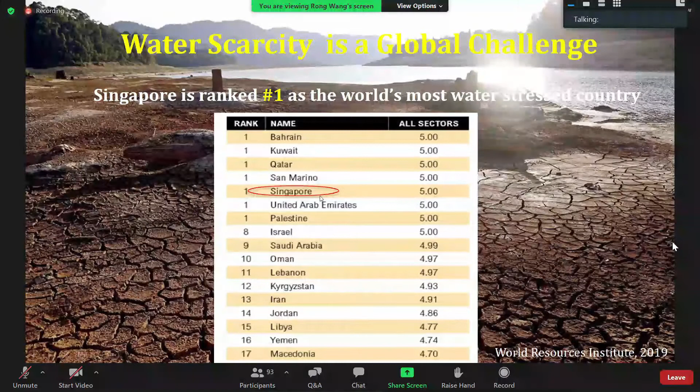Let's start. We know water scarcity is a global challenge. According to data released by the World Resources Institute in 2019, Singapore is ranked as the number one most water-stressed country in the world. Here is the ranking list, with Singapore listed here. On the other hand, we know the ocean on Earth contains around 97% of the entire water supply. Seawater represents a virtually infinite water resource, with almost half of the world's population living within 100 kilometers of an ocean, meaning we can access the ocean quite easily.

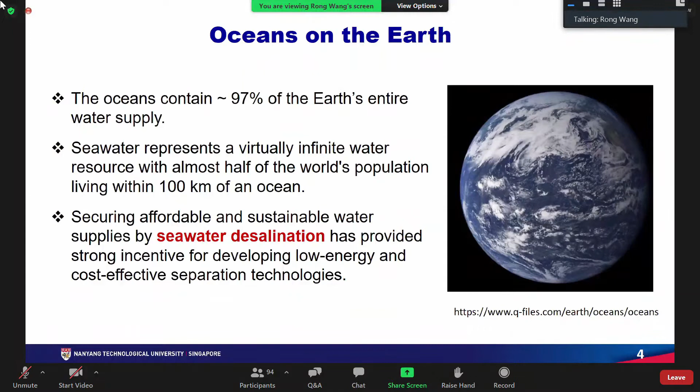So securing an affordable and sustainable water supply by seawater desalination has provided strong incentive for developing novel desalination technologies. In the past 20 years, there has been tremendous growth in constructing desalination plants for sustainable water supply. Among the various desalination technologies, seawater reverse osmosis is dominant in the market due to its better energetics and lower footprint.

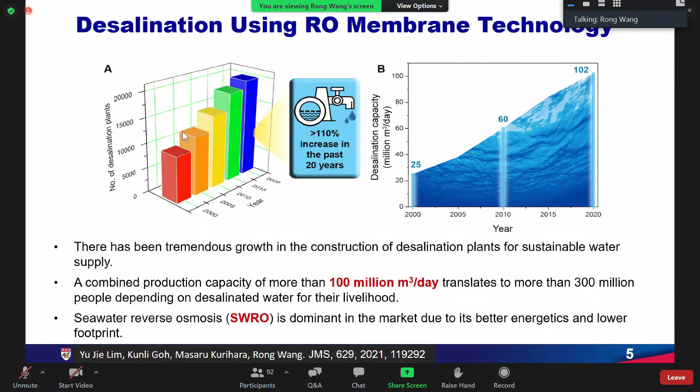Now let's look at Singapore's situation. Singapore started its desalination journey in 2005 when the first desal plant was set up. Currently, Singapore has 4 desalination plants, with one more ready very soon. Today, desalinated water can meet up to 25% of Singapore's current water demand, and by 2060 this number will increase to 30%, which refers to our future water needs.

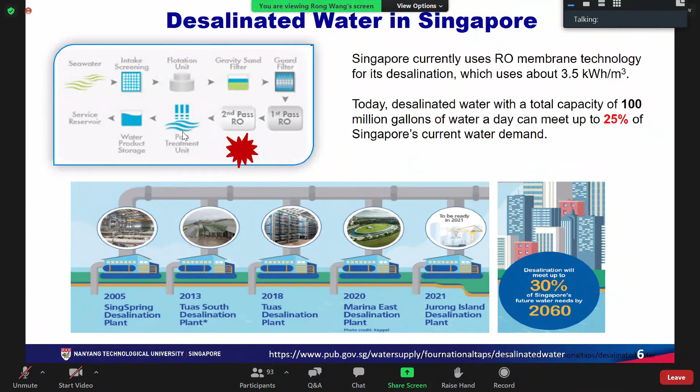As I mentioned, reverse osmosis is the dominant, state-of-the-art technology for seawater desalination. At the center of RO technology are thin film composite (TFC) RO membranes. The typical structure is shown here: a TFC RO membrane has a relatively thick and porous support, with a thin polyamide active layer on top, about 200 to 300 nanometers thick, formed through interfacial polymerization, where MPD in the aqueous solution reacts with TMC in the organic phase. So the key factor deciding TFC membrane performance is the top selective polyamide layer.

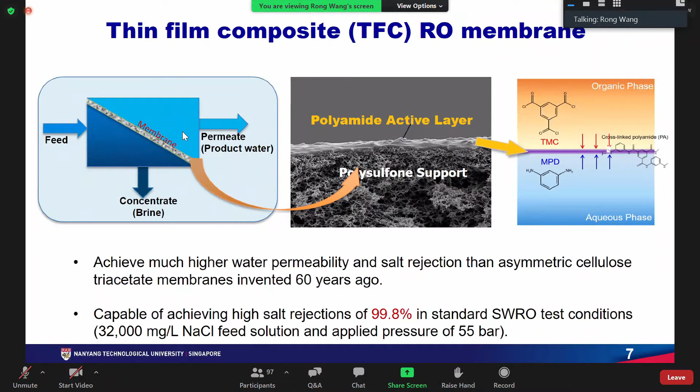Over the last 60 years, there has been tremendous growth for the SWRO membrane. For SWRO membrane development, you can see from this milestone chart, starting from 1963.

Now in the 2000s, SWRO products in the market were produced by key industrial players like GE, Koch, Dow, Toray, Hydranautics, and Nano H2O. Those membranes have very good salt rejection, around 99.7 to 99.8%, and water permeability around 1 to 2 LMH per bar.

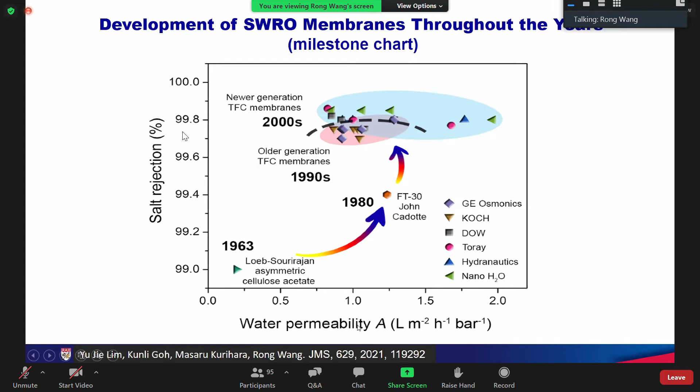However, further exploitation of this technology is limited by the relatively low water permeability and the high specific energy consumption required, which multiplies to high unit cost for water production. In addition, membrane fouling, insufficient boron rejection, and poor chlorine resistance are challenges for SWRO membrane development.

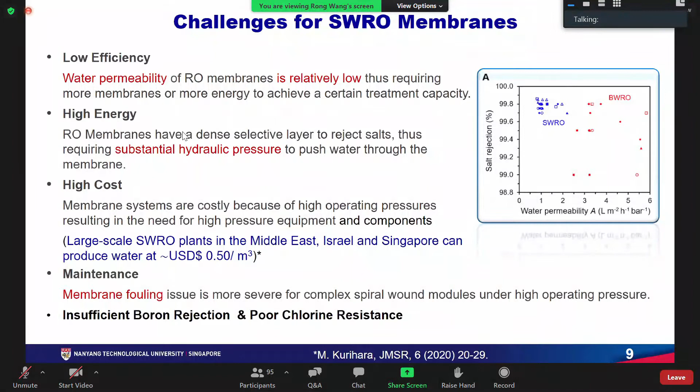For SWRO, it was projected that if water permeability increased from 1 to 3 LMH per bar, the energy consumption and the number of pressure vessels of the SWRO plant can be reduced by 15% and 44% respectively. In other words, the ideal SWRO membrane should have water permeability around 3 LMH per bar with sodium chloride rejection around 99.8%. This is referred to seawater.

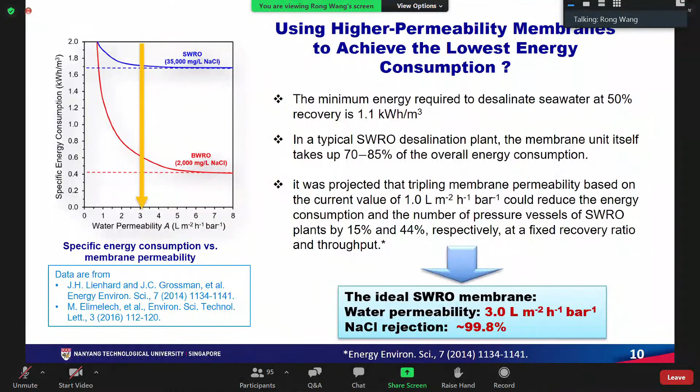Now let's look at the recent progress for SWRO membrane development in the last 10 years. It is a big surprise to see the numbers of publications and patents for SWRO membranes are quite low, especially compared with publications for BWRO membranes. I think it indicates it's quite challenging to develop the SWRO membrane as compared with the BWRO membrane.

But in the market, from time to time, we always see new products or new brochures from SWRO membrane manufacturers like Toray, DuPont, Hydranautics, LG Chemicals. I think their innovations are considered proprietary information that was not published openly.

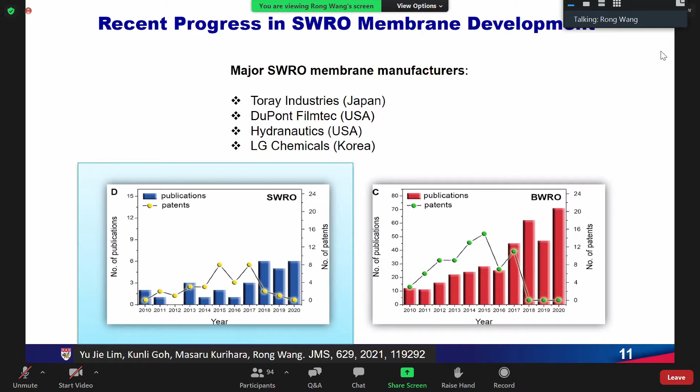So, what can we learn from the literature? Here I summarize some key factors and challenges for the synthesis of the SWRO membrane. I will go through this information in the following slides.

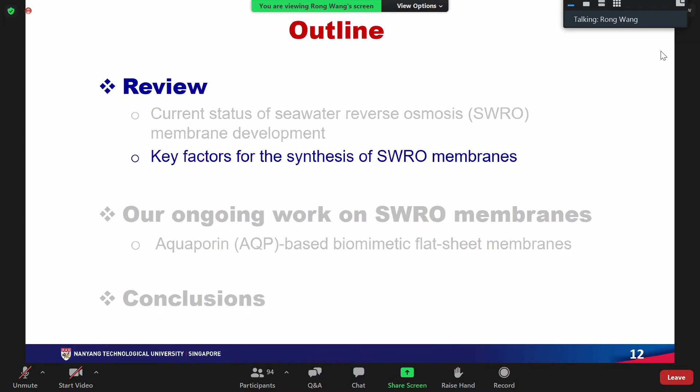Some research concerns the substrate. Indeed, the substrate is the platform for the interfacial polymerization to form the selective layer. So the surface property and pore structure will definitely affect the IP layer formation. People try to optimize the support layer in terms of pore size distribution and pore density.

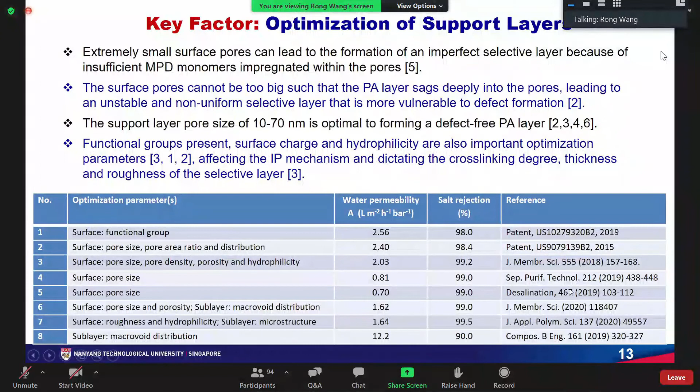Also, people try to adjust the surface charge and hydrophilicity of the support layer in order to get better membranes after applying interfacial polymerization. Some key references in recent years are listed in this table.

We hope to minimize the mass transfer resistance in the substrate and provide a better platform for the IP layer formation. We found a more porous support can also be used for SWRO membrane fabrication if it has a recurring finger-like sublayer structure, so that the stress is evened out on the support. You can look at the structure like this.

This is the structure we developed, and we did the analysis, and also measured the mechanical strength to confirm it's strong enough.

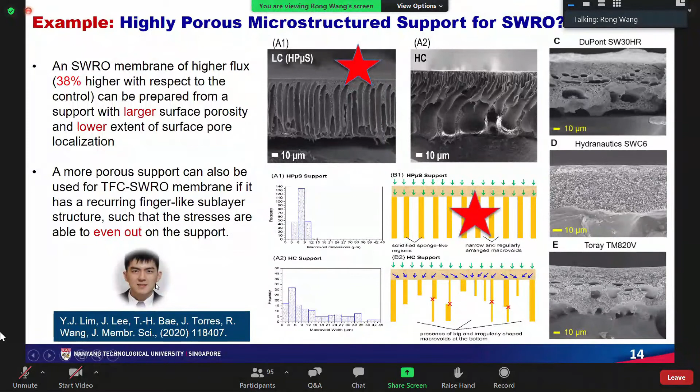We understand that for the TFC-RO membrane, the selective layer plays a critical role in determining membrane performance. So a lot of R&D focuses on optimization of the selective layer. We can change the interfacial polymerization formula or procedures in order to adjust the matrix structure and finally fine-tune the membrane performance.

Four important parameters affect the permselectivity of SWRO membranes: thickness, roughness, cross-linking degree, and hydrophilicity of the polyamide layer. So by changing the interfacial polymerization formula and procedures, we can change these parameters.

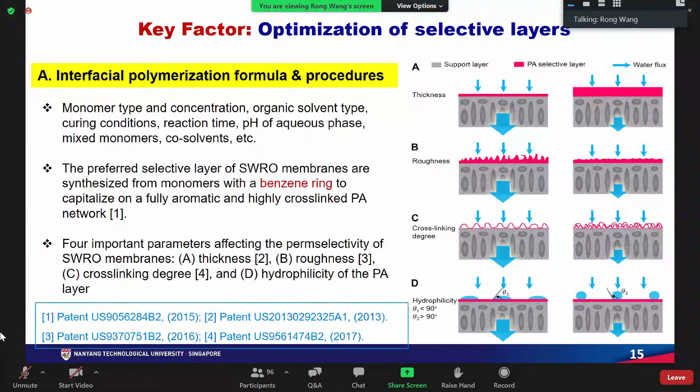Here I give you another example, also done in my group. We try to understand the role of the aqueous and organic co-solvent in fabricating SWRO membranes. We found the presence of co-solvent in the aqueous phase promotes the diffusion rate of the diamine monomers, and in turn tailors the physical chemical property of the polyamide layer, so we can improve the membrane performance.

This work was done by my other PhD student, Li Can, and this manuscript has already been submitted to the journal. It is currently at the first round of revision.

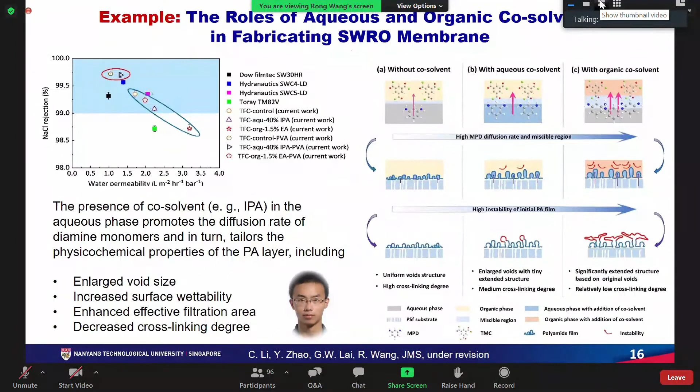Different types of filler materials like zeolite, graphene oxide, carbon nanotube, MOF, etc. have been widely used to make thin film nanocomposite SWRO membranes to enhance membrane selectivity, boron rejection, chlorine resistance, or reduce membrane fouling. But the issue is that incorporation of filler material in the polyamide layer can lead to defect formation, which will compromise the membrane selectivity. Another challenging issue is that when we scale up the fabrication, how to avoid the defect formation. This is the critical issue.

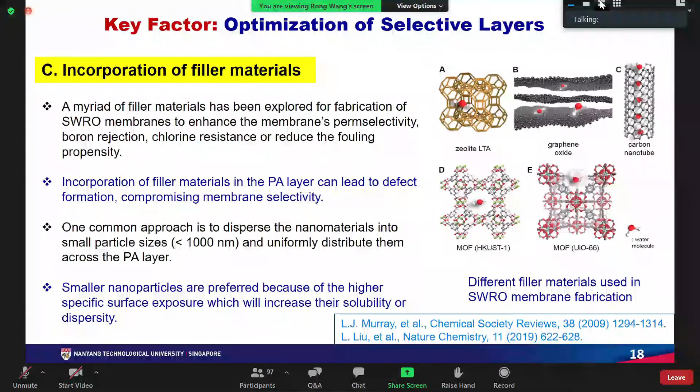Biomimetic membranes have attracted much attention in the last 10 years because of the outstanding water transport property of natural water channel proteins like in biological membranes. One of the successful fabrication methods was based on incorporation of the water channel or synthetic water channel within lipid bilayers or amphiphilic block copolymer.

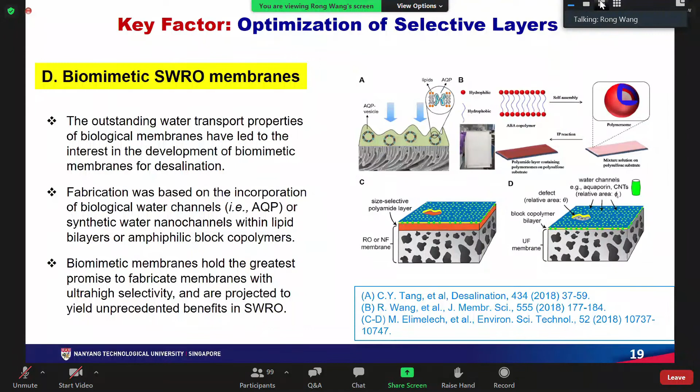This channel-containing vesicle will be embedded into the polymer matrix through interfacial polymerization. Actually, this method was invented by us at the Singapore Membrane Technology Center. We reported the first aquaporin-based flat sheet membranes and aquaporin-based hollow fiber membranes for brackish water and water reuse application in 2012 and 2015, respectively.

For flat sheet membranes, the water permeability can improve by 50%. For hollow fibers, the permeability increased by 100%, double the permeability, while maintaining similar level or even higher salt rejection.

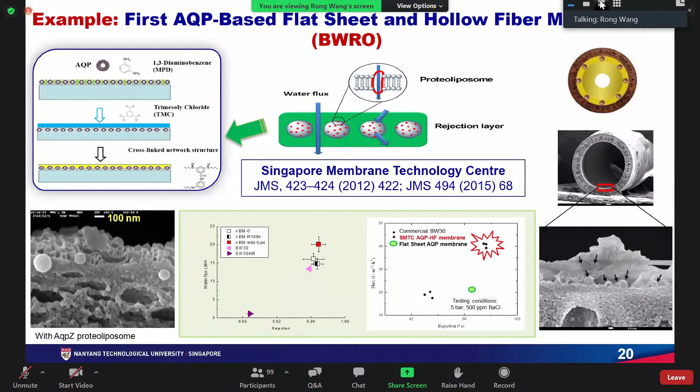We have scaled up the fabrication of the biomimetic membranes to an 8-inch size membrane module containing 12,800 pieces of fiber.

This is the hollow fiber, RO type, and the membrane can operate at low pressure for brackish water and NEWater application. Currently we have a pilot system running at the Singapore local NEWater production plant, and the testing has been over 220 days. The capacity is 14 cubic meters per day for clean water production.

Our test results demonstrate that our membranes can lead to 40 to 50% pumping energy saving for new water production. This is a very exciting result. And our technology has been licensed to a spin-off company last year, MEM+, for commercialization.

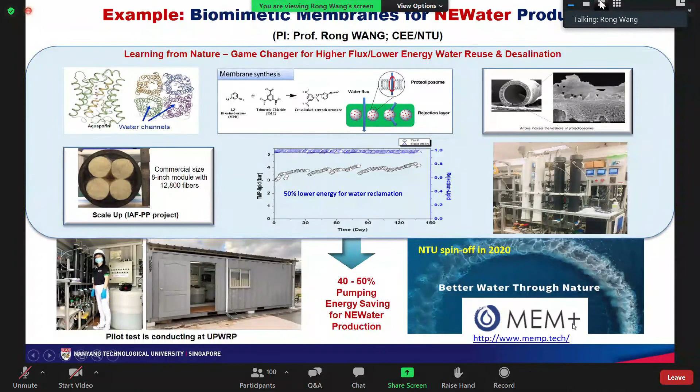What I just talked about is the biomimetic membranes for brackish water application. We also try to make aquaporin-based biomimetic membranes for seawater desalination. We know for seawater desalination, the conditions are more challenging because of the high salinity.

The rejection layer should be very tight so that it can reject the salts. Finally, we worked out the first aquaporin-based biomimetic membranes for seawater desalination in 2019. This work was published in the Journal of Desalination, and Dr. Li Ye and other team members contributed to this work.

This work gives us confidence. It shows the aquaporin-based membranes also have the potential to be used for seawater desalination.

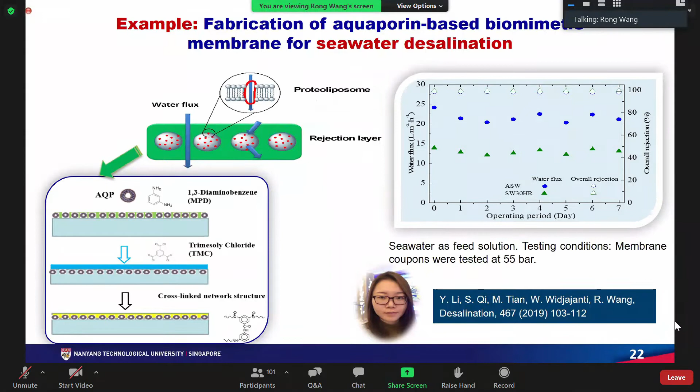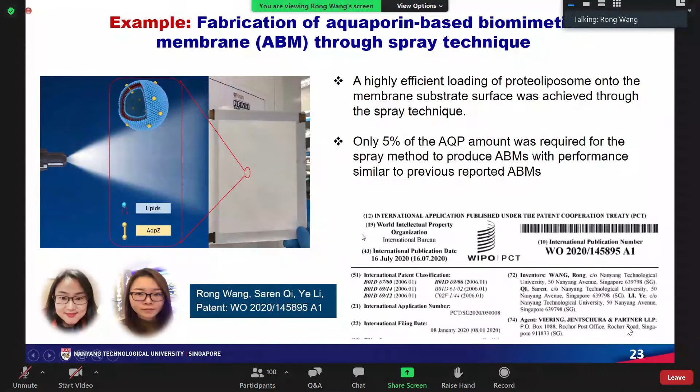Now I will go through some details to show you what we are doing now.

The objective is to fabricate high-performance flat-sheet seawater aquaporin-based membranes by enhancing the salt rejection over 99% to sodium chloride and double the water permeability compared to the commonly used SWRO membranes in the market.

In the second phase, we'll scale up the membrane fabrication to make 2.5-inch and 4-inch membrane modules. We will build a pilot with capacity of 10 cubic meters per day of clean water from seawater using our biomimetic membranes for water production. That's a very challenging task.

The first step for us in this project is to optimize the substrate. We developed a new substrate by ourselves using polysulfone material. We fabricate polysulfone UF type membranes on pilot scale casting machines. The optimized substrate has water permeability around 330 LMH per bar with average pore size around 32 nanometers.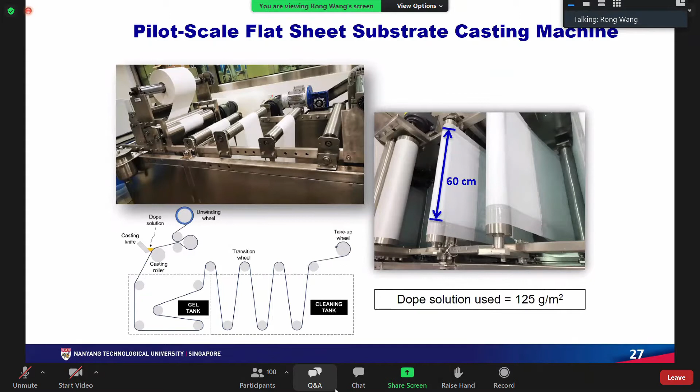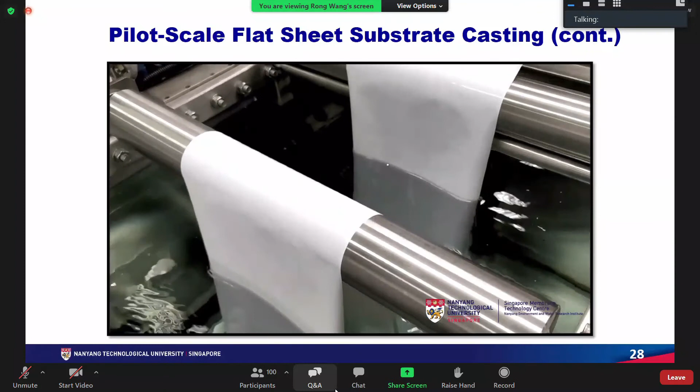We prepare the polymer dope and use PET non-woven as a support. After the polymer film is applied on the support, it enters the water bath to precipitate, forming the UF type membrane as a substrate. The width of these membranes is 60 centimeters.

Through these machines, we found out the substrate performance is very good. It has very good quality control. The reproducibility is very good.

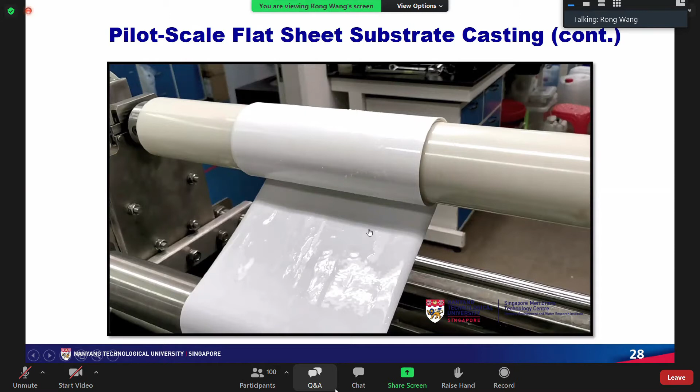We try to understand the impact of the substrate on the IP layer formation. We conduct a fundamental study. For example, we found appropriate MPD TMC ratio and efficient transport of the amines toward the organic phase is critical. It could lead to a highly permeable and highly selective polyamide selective layer.

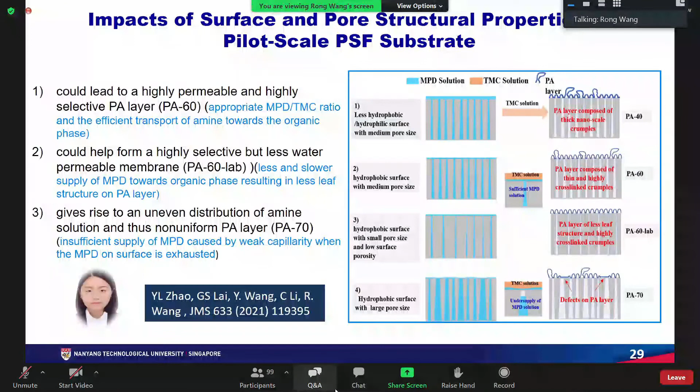This work was done by Dr. Zhao Yali and the other team members, and this is recent work published this year.

We also found, ideally, a hydrophobic substrate with smaller surface pores and high surface porosity is preferred for the IP layer to form the thin film.

Through this substrate optimization, we get the best SWRO membranes that have a sodium chloride rejection over 99.5%, and the water permeability is 1.72 LMH per bar under seawater desalination conditions.

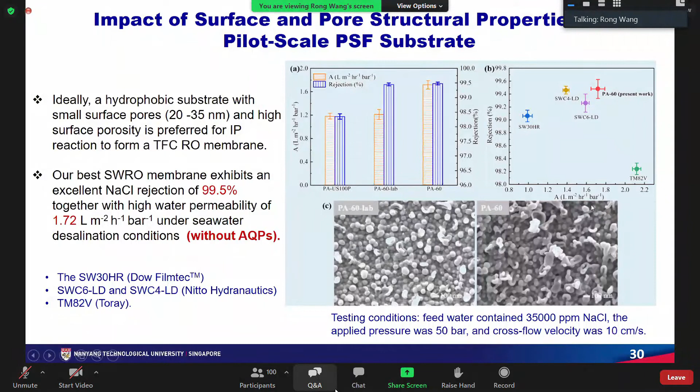I would like to draw attention here: without aquaporin incorporation, we just optimized the substrate. We compared our membranes with commercial membranes in the chart, and you can see our membranes show pretty good performance.

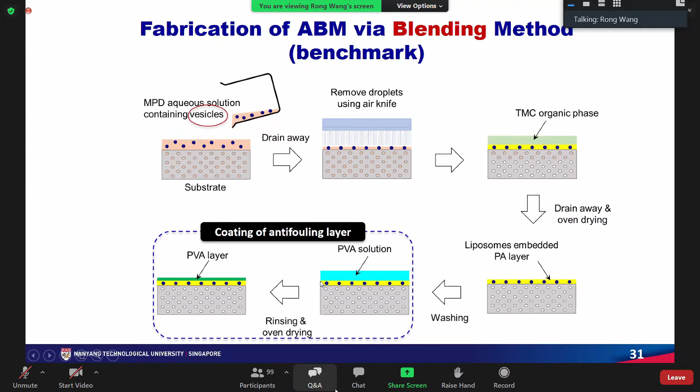The second step is to incorporate aquaporin into the selective layer. First, we use the blending method, the conventional method we used before. This means we mix the aquaporin-containing vesicle with the MPD aqueous solution, then go through the normal interfacial polymerization procedure. Finally, we use PVA coating to form the antifouling layer.

This means the aquaporin vesicle will load directly in the thin film of the MPD aqueous phase, then we apply TMC and go through interfacial polymerization. We found the after-aqueous-phase option is better because it can keep all the aquaporins inside the matrix, without wasting any aquaporin or lipid.

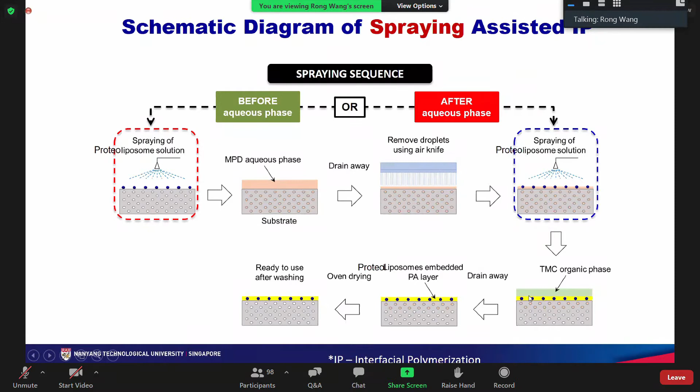Here, we built an automatic spraying machine to do the work. You can see the nozzle spread aquaporin, moving from the left-hand side to the right-hand side. The membrane substrate also moves from front to end. In this way, we can ensure uniform coverage of aquaporin on the substrate surface.

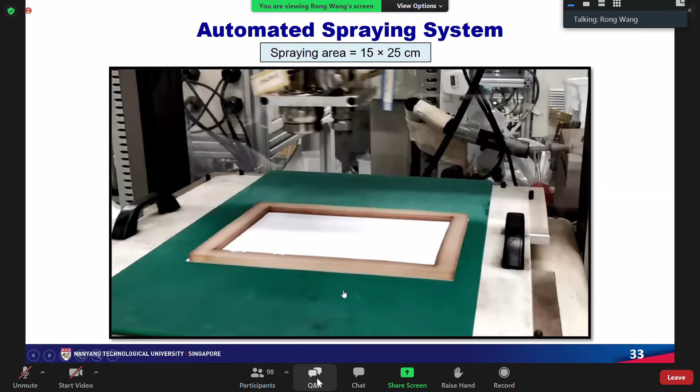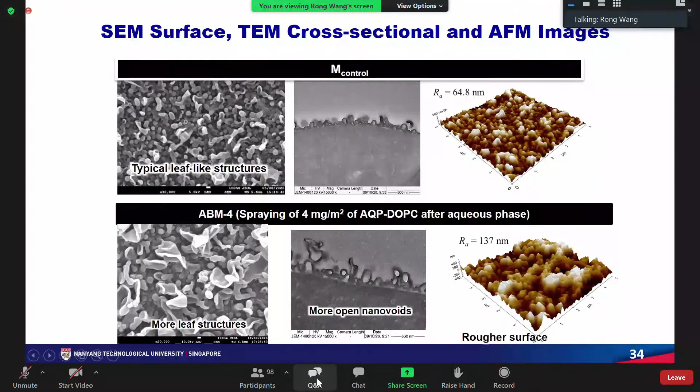Now I'd like to show you the SEM, TEM, and AFM images of our two membranes: one control without aquaporin incorporation, and one aquaporin-based SWRO membrane. With the incorporation of aquaporin, the polyamide layer has more leaves, and more open nano-voids compared to the control. The surface roughness was also much higher compared to the control membrane.

Look at the performance: now we get membranes with water permeability of 3.36 LMH per bar, and salt rejection over 99%. The enhancement compared to the control membrane is over 30%, while maintaining very high salt rejection. This result is very exciting.

Later, we do PVA coating to enhance the antifouling property. At the same time, it can boost salt rejection. The rejection can be further enhanced by sacrificing a little bit of water permeability.

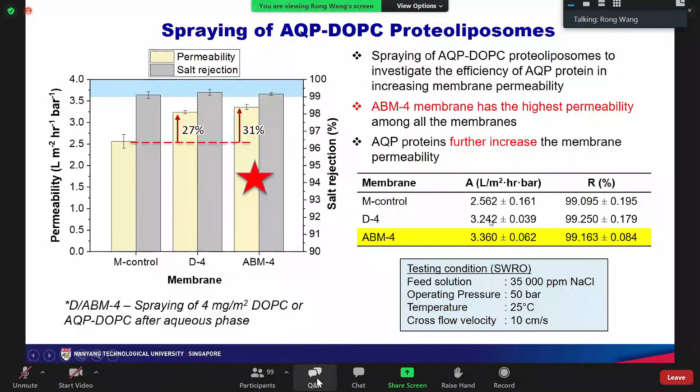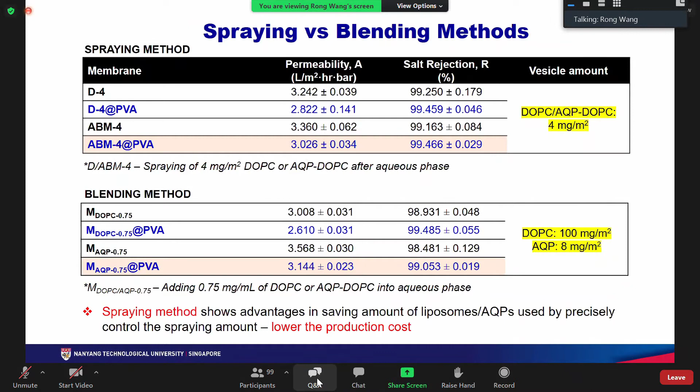We compare the two methods, spraying and blending, to load aquaporins. Both membranes can work, and we get similar aquaporin-based membranes. The performance is very similar, but the spraying method offers advantages in saving a large amount of the liposomes or aquaporins used, by precisely controlling the spraying amount on the substrate. So the production cost will be reduced. That's the advantage.

We also compare the performance of our newly developed aquaporin-based SWRO membranes with commercial membranes. You can see here, our membranes are listed, showing water permeability and R, the rejection. All the membranes were tested in the lab under the same condition, for a fair comparison.

You can see our aquaporin-based membranes with PVA coating exhibit the best overall performance, much better than the commercial membrane. You can see the result here.

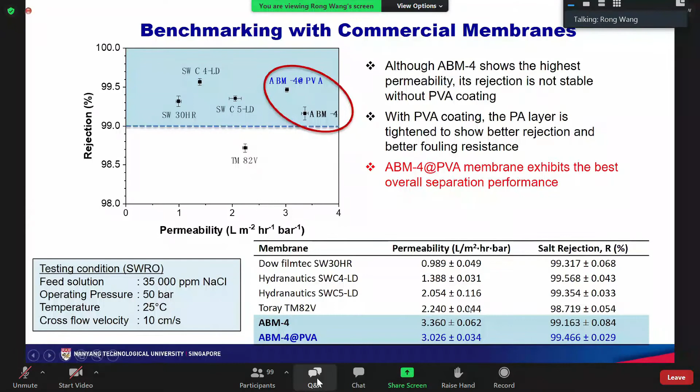We also do long-term testing to understand the fouling impact and chemical stability. We know the membrane needs chemical cleaning, so we wonder if our membrane is stable when we use chemical agents for cleaning. We follow the standard protocol for membrane cleaning: physical cleaning, followed by alkaline chemical cleaning and acid chemical cleaning.

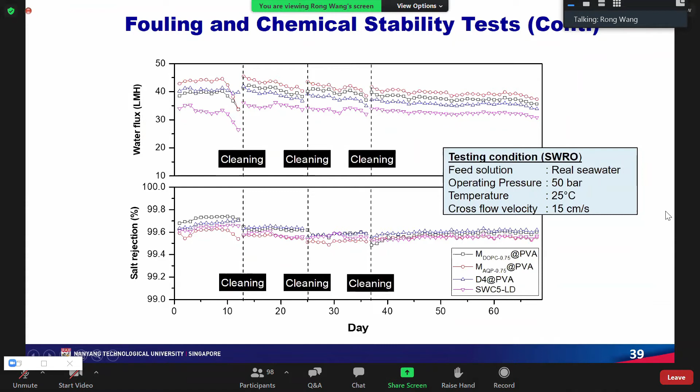Now here are the results. We did long-term testing over 70 days, non-stop, using real seawater. We tested 4 types of membranes: 1 commercial membrane and 3 in-house made membranes. You can see the aquaporin-based membranes show the best performance in terms of water flux, while salt rejection stays at a similar level as other membranes, over 99.6%. This result is very exciting.

We also test boron rejection for our newly developed membranes. We know SWRO membranes need to exhibit reasonable boron rejection, like 70 to 80%. We tested all the in-house made membranes and found comparable or even better boron rejection compared with the commercial SWC5 LD membrane, since that is one of the best membranes in the market now.

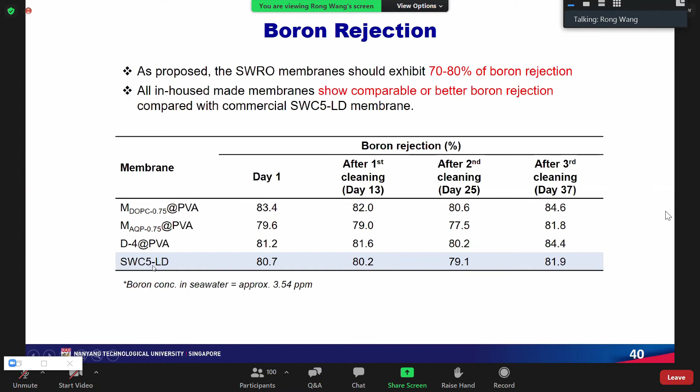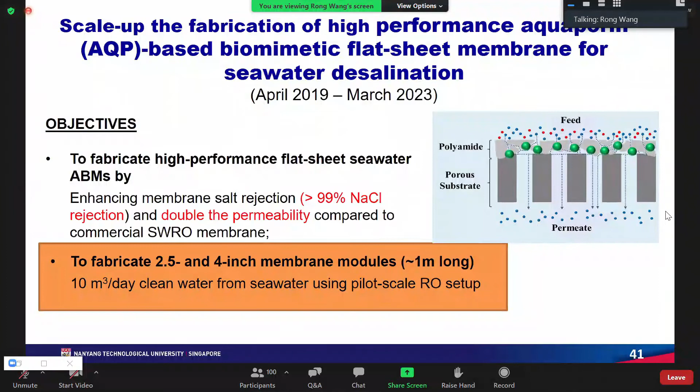Because of very good results in the laboratory, the project has now entered the second phase. We will scale up the fabrication to make 2.5-inch and 4-inch membrane modules, and later build a 10 cubic meter per day pilot system to test our aquaporin-based SWRO membranes.

Here is the setup and facilities used for the membrane scale-up production. This facility is from Separation Technologies Applied Research and Translation, the START Centre in Singapore. We collaborate with START for this scale-up production, and we only need to modify the fabrication line a bit.

Just add a spray nozzle, you can see here. The nozzle will spray the aquaporin onto the surface of the membranes. This work is ongoing.

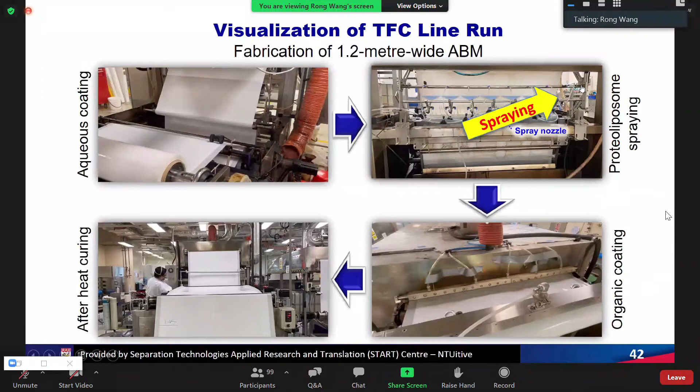Before I wrap up my presentation, I'd like to point out that it's important to have a common understanding of the difference between SWRO and BWRO membranes. Because of the high salinity of seawater, SWRO membranes should have a very tightened selective layer, since the high salinity imposes stringent requirements on the membrane structure.

SWRO membranes for seawater desalination need to reject salts as much as possible, so the matrix of the polyamide layer should be tightened enough. The thickness will also change and become thicker compared to BWRO membranes.

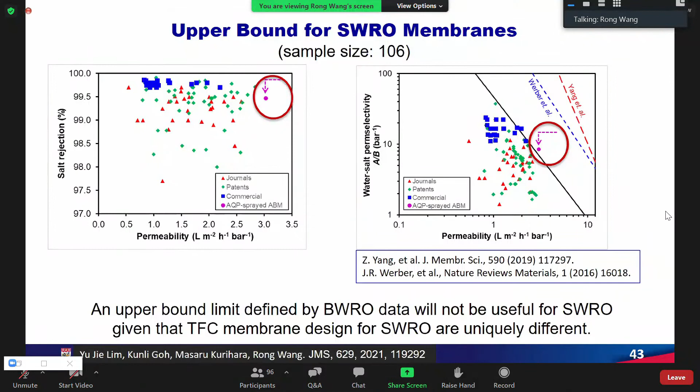Now I would like to make conclusions. RO technology is one of the most efficient technologies for seawater desalination. In this presentation, recent progress in SWRO membrane development with focus on the perm-selectivity trade-off was reviewed. We have successfully developed novel biomimetic SWRO membranes and are now moving towards scale-up production.

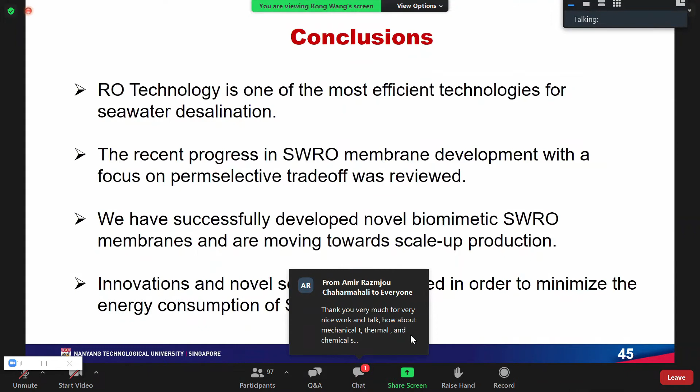Innovation and novel solutions are needed in order to minimize the energy consumption for the SWRO process.

This is the last slide. I would like to thank all the staff and students who worked with me on this topic over the past years. Especially, I would like to thank the current team members: Dr. Lai Guosong and Dr. Zhao Yali, the two research fellows, and the two PhD students, Lim Yujie and Li Can. This is the team's effort. I would also like to thank the funding support from NRF and PUB.

Without the funding support, we cannot do anything. All this work was conducted at the Singapore Membrane Technology Center, which is supported by the Singapore Economic Development Board. I would also like to acknowledge the support from the EDB. With this, I would like to thank you for your attention, and I'm more than happy to answer your questions.

Thank you, Professor Wang, Professor Rong Wang, for the exciting research, and congratulations on your large modules. That's what we always want to achieve, but you are the first person to achieve it. There are some questions from the audience, so I will read them for you.

First is from Amir. Thank you very much for the very nice work and talk. How about the mechanical strength and thermal and chemical stability of biomimetic SWRO membranes?